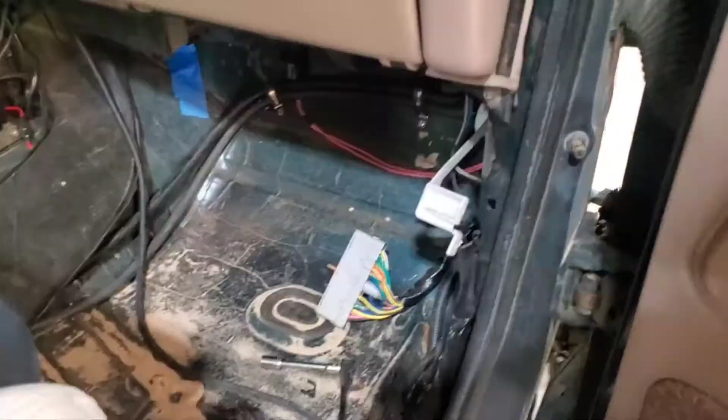Yes, I haven't vacuumed out the sand yet.

So, stock computer location. Mustang computer is out. Gone. I'm going to be joining the standalone ECU club. Brian Rasey, Brad Kumler, John Parks have all been running Microsquirt, and they seem to really love it with no issues. So, now that I'm having issues with this truck, I'm going Microsquirt. So I got everything laid out here, and I'm going to start prepping the truck and getting this installed. It's really pretty basic. It's pretty much plug and play.

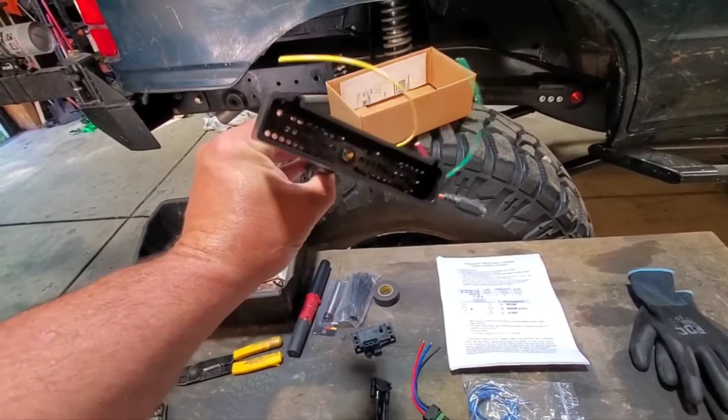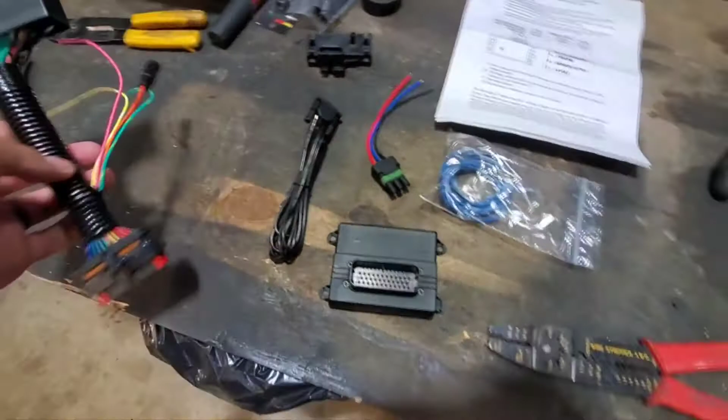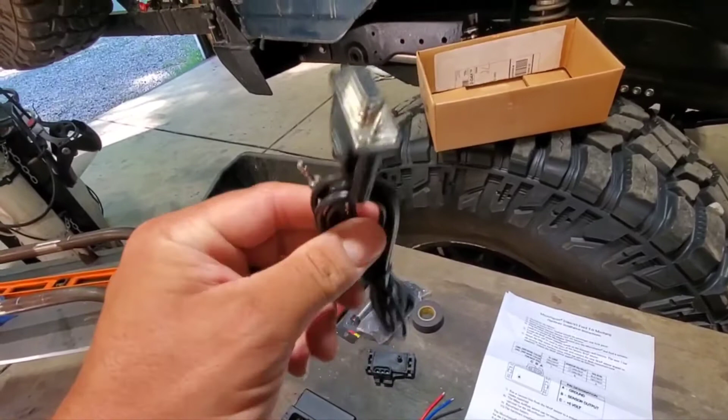You get the main harness, which goes to the factory computer harness in the truck, the 60 pin, and then the Microsquirt computer, which is really small in comparison to a factory computer. Look at the size difference. So like I said, this goes to the factory 60 pin plug, then this goes to the Microsquirt, and then you have a 9 pin connector, which is your programming tuning port for a laptop or tablet or Raspberry Pi device.

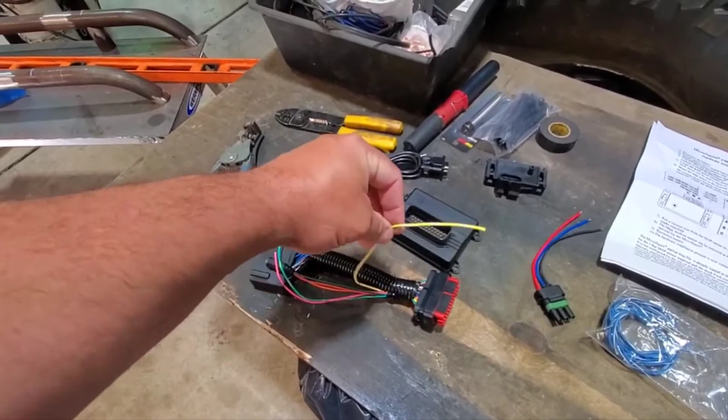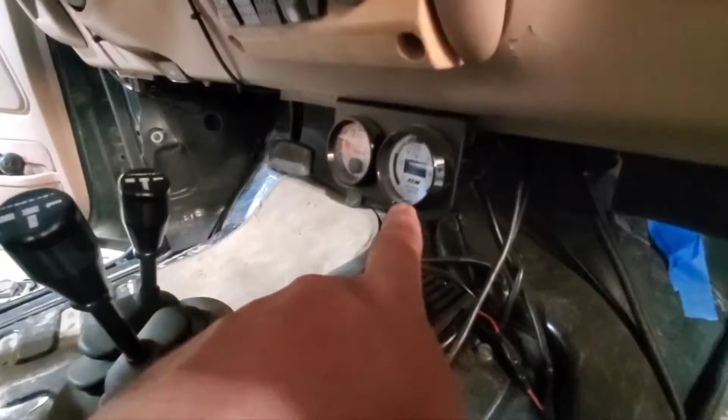You got 3 wires here. The yellow one's optional. That's to control an electric fan via the Microsquirt system. And then the green wire is a tach hookup. My tach's already hooked up and set, so I don't need to worry about that one. And then the last one is the pink wire. This is what goes to your air fuel wideband gauge. So my wideband gauge is right here. There's a white wire that supplies the output, 0 to 5 volts. So the pink wire will tap into that white wire. Just has a 3-foot run, no big deal. So that sums up that part of the deal.

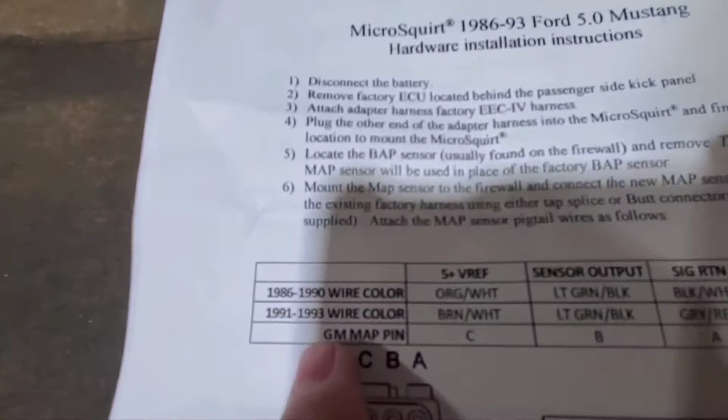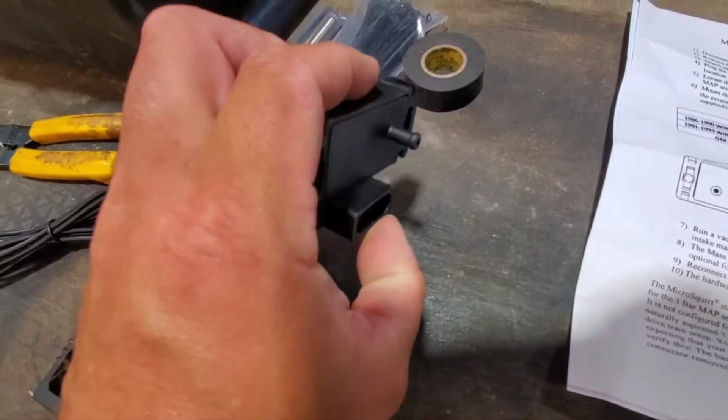And then the factory Mustang setup runs a BAP sensor, barometric air pressure. That gets swapped out with a MAP sensor. So they supply that, a Weather Pack plug, pigtail with 3 wires, and then depending on what wire harness you have, the corresponding wire colors to match the pigtail. And then you just supply a vacuum hose pickup for the MAP sensor. And that completes the install of Microsquirt as far as hooking it up. So let me get started.

So one advantage of the Microsquirt already is you eliminate the mass air sensor. I guess you can run it with it, but with my situation going on here, I'm still not sure if it is actually one of the computers. I mean, how likely is it to have 2 computers both acting up in different ways? This is the only other thing that I didn't have any extras to swap out with. I don't have another 24-pound injector calibrated sensor laying around to test and see. So there's a chance that this actually is what's causing some issues too. So this is going bye-bye.

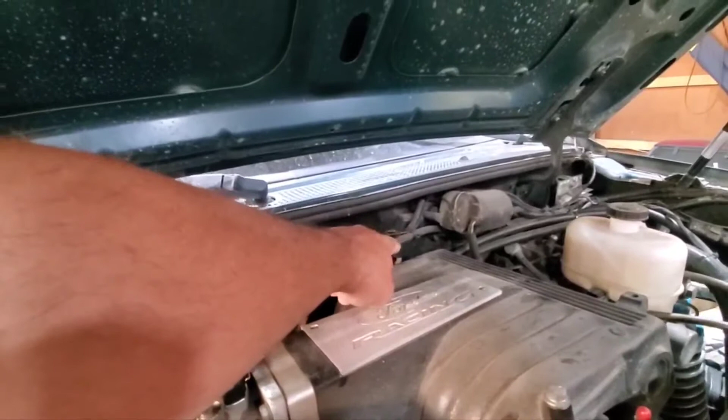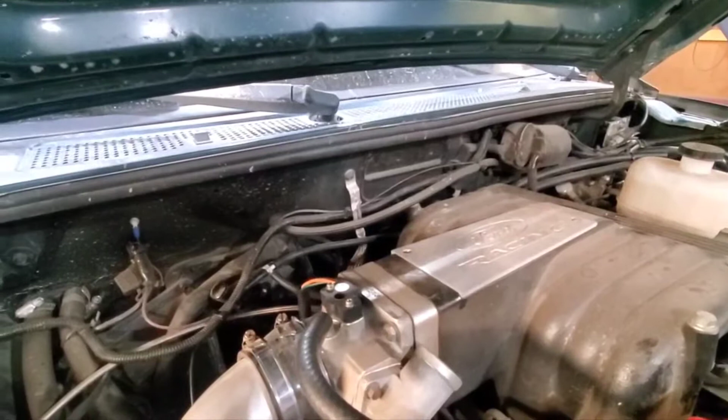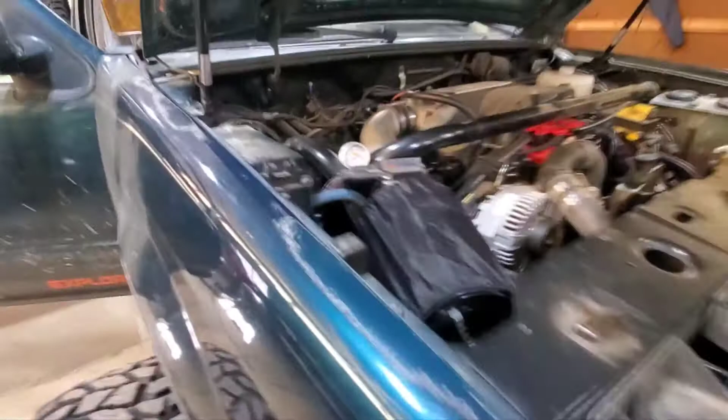My BAP sensor is mounted right here, so I'm just going to unbolt that. I believe there's enough harness to actually bring it over here. And then I'll figure out what wire harness I have color-wise and match up the new MAP sensor. Remember, this has a Ron Francis aftermarket brand new harness on it. So I gotta see what color code the Ron Francis harness uses, if it matches one of the 2 ranges of the Mustang harness.

So whether it's going to match an 86 to 90, or if it's going to match a 91 to 93 color code. But we'll figure that out here in a minute.

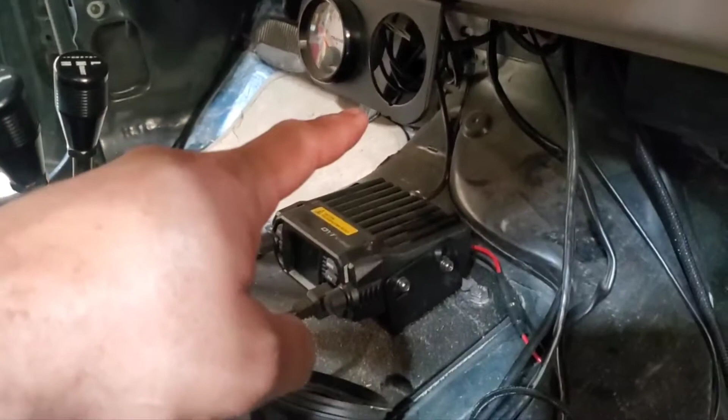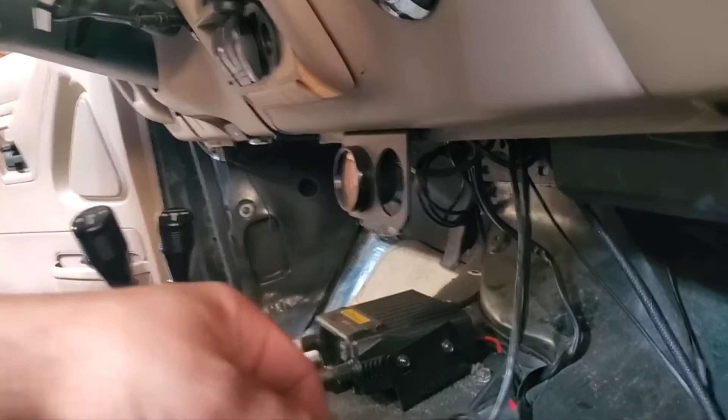Alright, so my first step is I already have an AEM air fuel gauge in the truck. So there's 2 harnesses on the back, a 4-pin and a 6-pin. 6-pin goes back to the actual wideband O2 sensor, and then the 4-pin is what gets your power and stuff from power source. And the white wire is normally a pigtail, but since it's already all wrapped up behind the dash, I wasn't going to pull all that out just to get the pigtail, so I just spliced into it right here. Adding on a wire lead here, and then I will cut it to length over here for the PCM side, to connect the other side to the pink wire here.

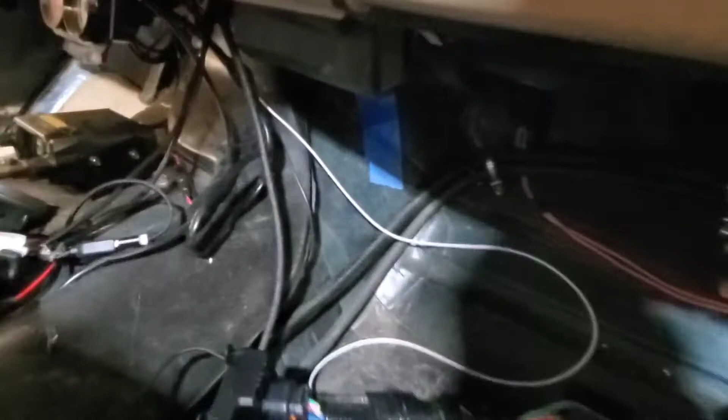Alright, so the white wire's tied in. Everything's been twisted together, soldered, heat shrink tubing, gauge is back in place, plugged in, and then like I said, the white wire taps into the pink wire, which is also obviously wrapped together, soldered, heat shrink, and then I just wrapped the excess with some electrical tape to keep this plug kind of fixed so it's not pulling on the wires.

So the air fuel gauge wire is complete. The pigtail harness is bolted to the stock ECM 60-pin plug. The Microsquirt computer is clicked and plugged in, and the laptop serial connection is plugged in also. Now let me get the map installed.

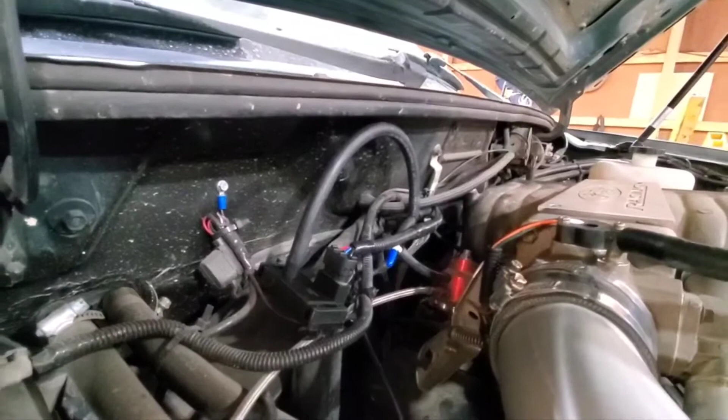Alright, so I got ahead of myself here. I meant to take a video of taking out the BAP sensor and swapping over to the new MAP sensor for the Microsquirt. It's not a big deal. Earlier in the video I explained the color codes and the harness. So there's plenty of harness on the Ron Francis. And so here's the BAP sensor that I took off with the color code.

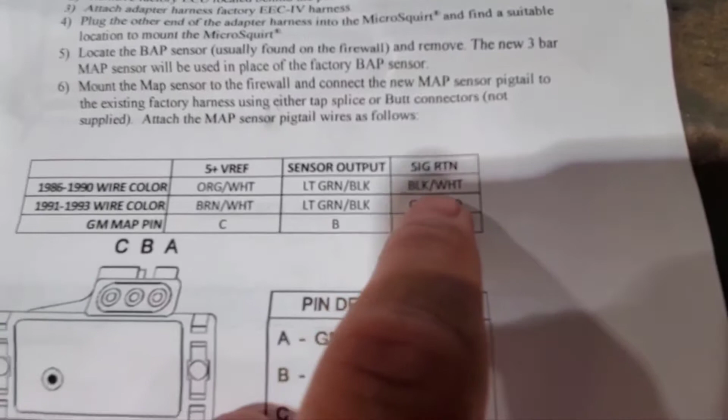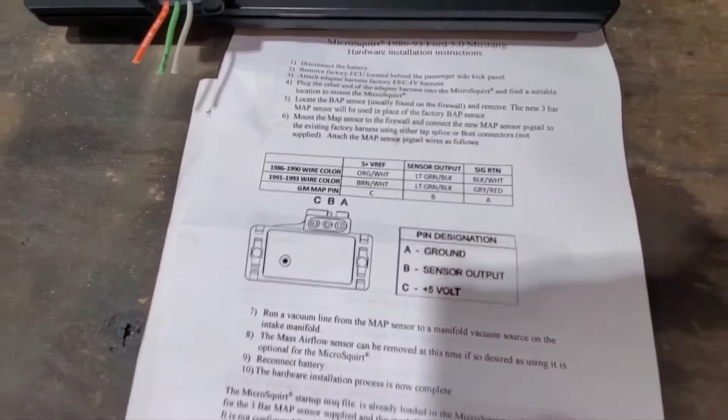So the Ron Francis basically matched the 86 to 90 wire colors. So the 5-volt wire, orange white, is orange on the Ron Francis, and then the sensor output, light green black, is the green wire on the Ron Francis harness, and then the signal return black white is basically gray on the Ron Francis harness. So the Ron Francis harness kind of follows the 86 to 90 color code anyway. So I just matched the colors with that, and you're good to go.

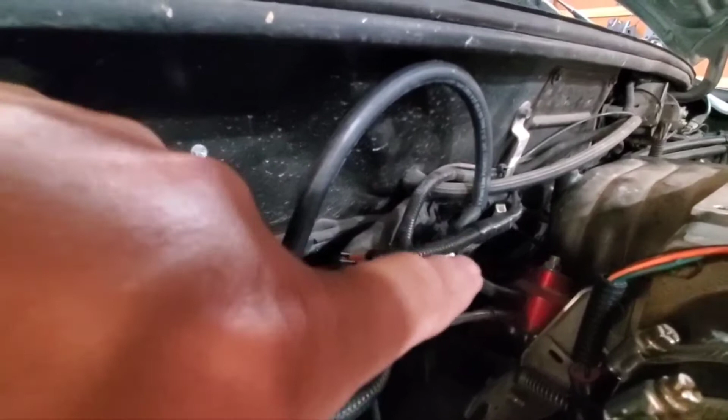So on the new MAP sensor, it's red, blue, and black. So the red went to orange, blue went to green, and then black went to the gray, on the Ron Francis harness, that is. Then I just added a vacuum tee, and then gave myself a little extra 1/4 inch vacuum hose. Still have to mount this yet. I'm gonna mount it somewhere. I need some longer screws though. It's a little bit thicker unit.

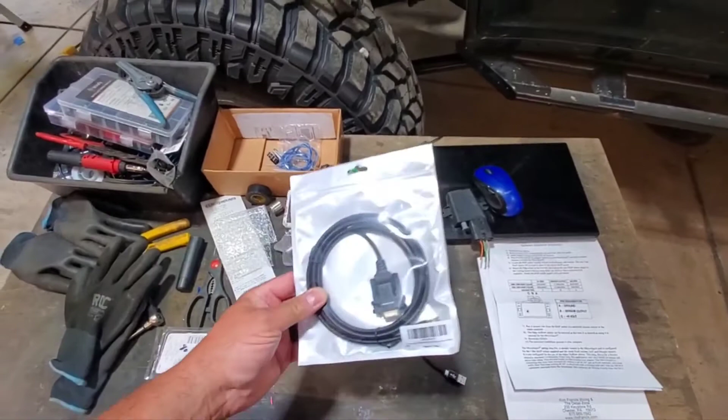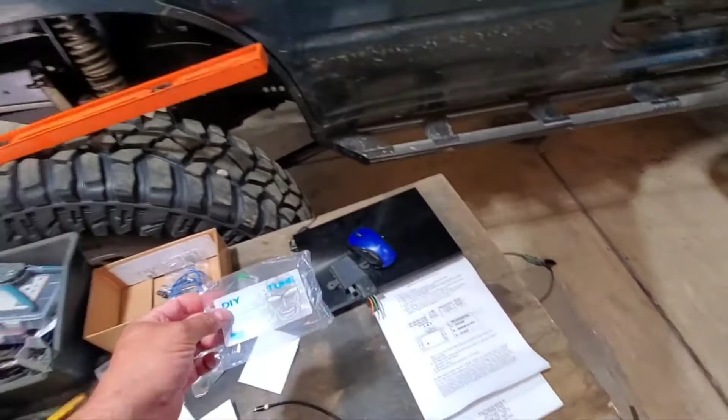So everything's all set. And then a lot of people have issues with the actual serial to USB adapters. So I had originally bought, because I did look up their instructions, and basically they want you to have a serial to USB that has an FTDI chipset in the cable. So this serial to USB has that chipset, but then our other buddy Eric Doucette recommended going to these guys, DIY Autotune, and buying their serial to USB adapter.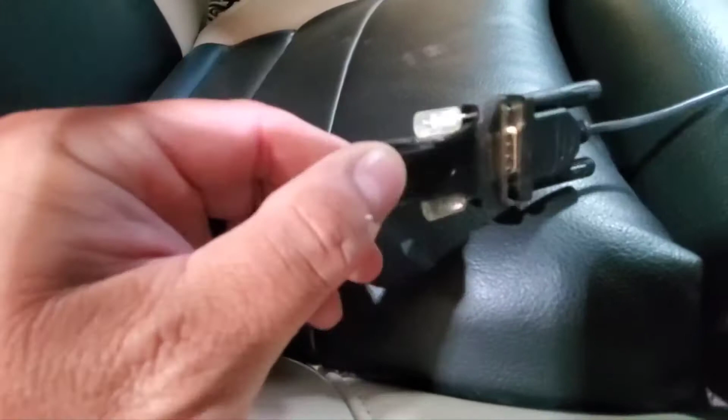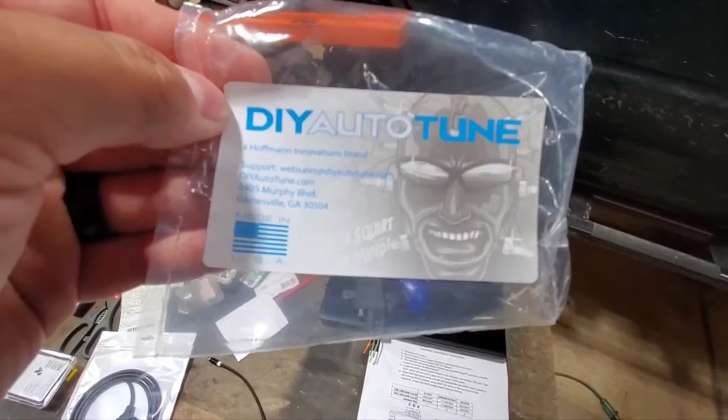It's guaranteed to work. So it comes as a short, hard type unit, and it does come with a USB extension pigtail harness too. So I chose to go with this brand because it's guaranteed, and they have full support. So I'm just going to return that one back to Amazon, even though that one probably would have worked. I don't even need to bother with it at this point.

All right, so that pretty much shows all of the parts and components of the Microsquirt system, how it's installed. I mean, it's really a real basic install setup. You're basically only touching a minimum of 4 wires. The signal wire, 0 to 5 volt from the wideband gauge, and then the three wires in the pigtail for the BAP to MAP sensor. And then you got the optional tach hookup and electric fan. So I already have that Flex-a-lite variable fan controller set up on this, so I'm just going to keep using that.

And then all of my gauges are Speedhut gauges, and obviously my tach's already set up. So if you already have an existing car, truck, whatever, that already has some stuff in place, you don't need to mess with it. But obviously if you're starting from scratch, then you would hook up whatever wires that you want to add to it. And then if you don't have an air fuel wideband gauge set up yet, obviously that needs to be added.

So huge shout out to Brian Rasey. He is the go-to guy here in Michigan with our group, especially our Team Ford that we have here in Michigan.

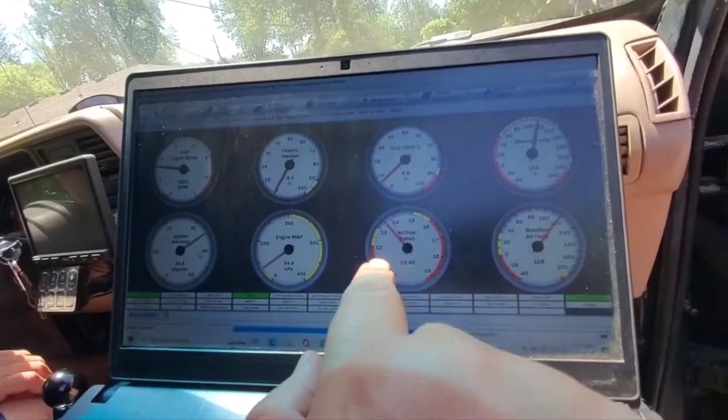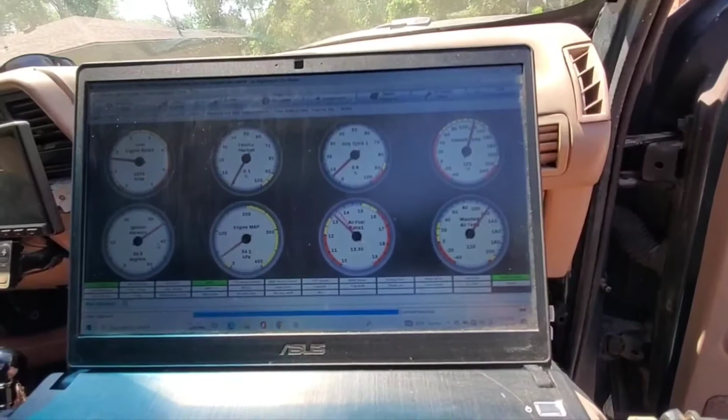Alright, we're going to do some cold start and some street tuning on Dan's truck here. So, I'm Brian Rasey from Random Adventures. So, I'll show you here real quick. I'm going to zoom in here. We're in warm-up enrichment right now, so 13.5 AFRs. That's actually pretty lean, but it's warm. We got 120 degree coolant temp, 120 air temp under the hood, so we're going to go for a cruise, get it up to normal operating temp, and get it out of warm-up enrichment. Then we can start making changes to it and see what it's doing. Rolling.

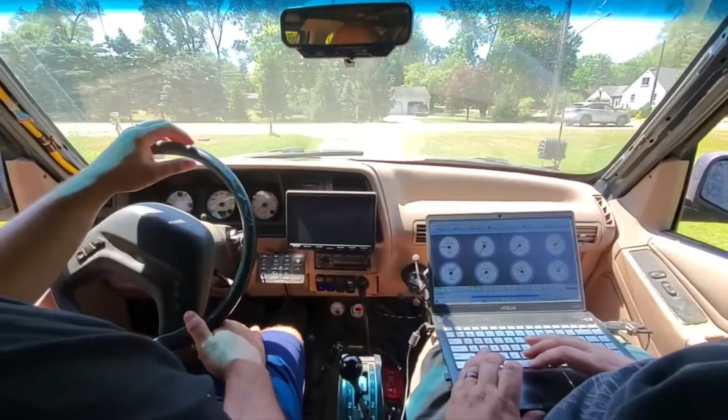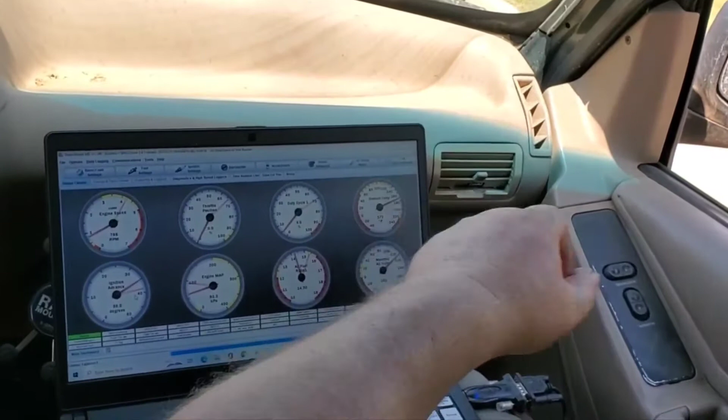All right. So you've already been doing a substantial amount of auto tuning. Yeah, I did probably a good 10 miles of street driving, and then probably almost an hour off-road with 4-low, loading up everything. Nothing crazy, but... All right. So for now, we're just going to watch until it gets up to temp. Oh, okay, so warm-up enrichment just turned off. So it must be after it passes like 170 degrees. So now we can go ahead, and you saw that little hesitation there.

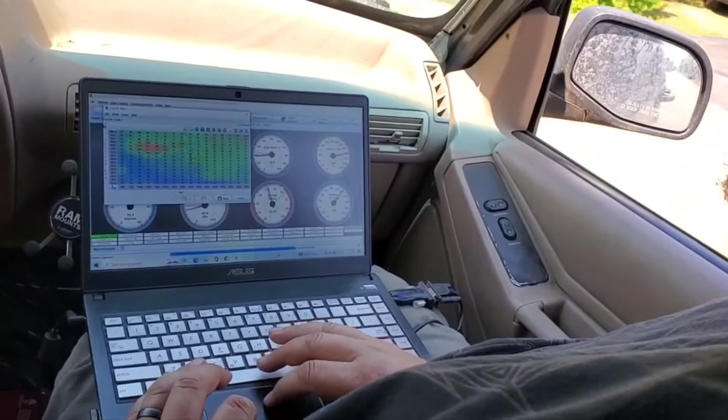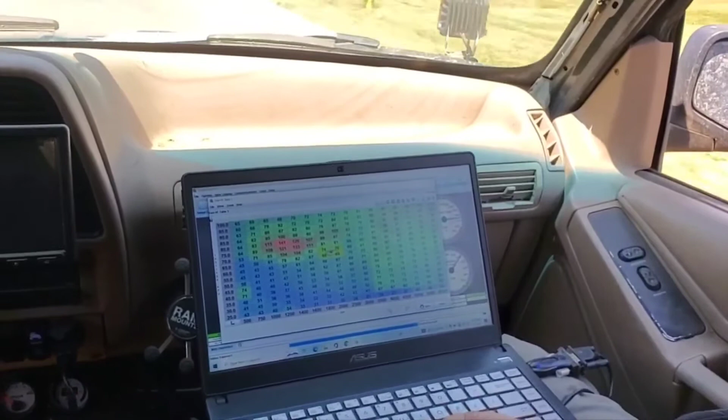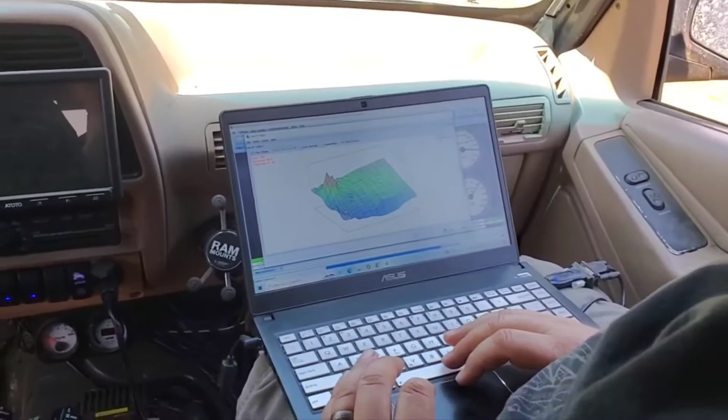So I'm going to open up the VE table here. The windows, too much noise. So you can see on the 3D map here all the peaks and the valleys where it's rich and lean. So up here, that's kind of a lean spot. Need to richen that up. Oh, I'm sorry, that's a rich spot. Blue would be lean. A lot of these little valleys down here need to be brought up. That's probably the hesitation right at initial takeoff.

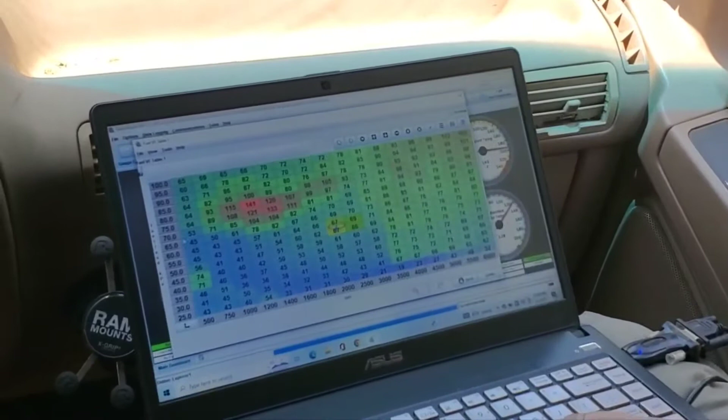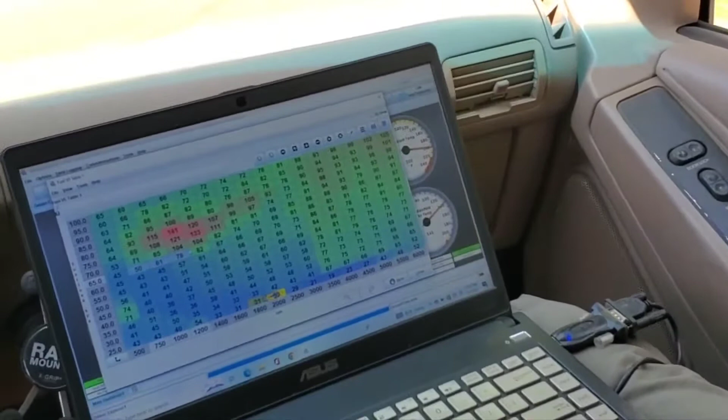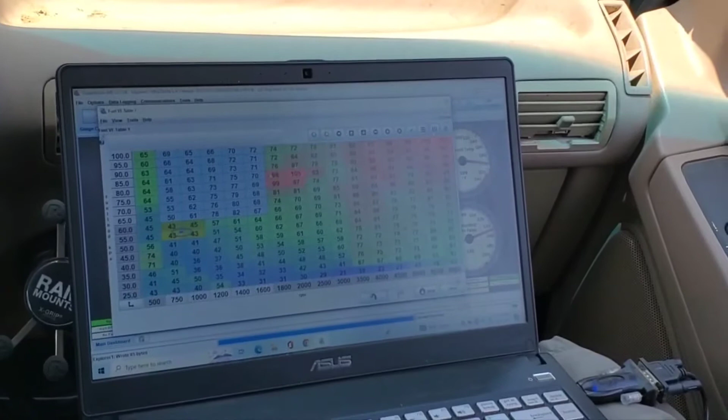So what I'm going to do, I'm going to highlight, I'm going to keep going for a minute. Turn right. Smooth. So all these cells here, we got all kinds of dips, peaks. We're going to smooth all of that out. So I'm going to interpolate on this side here. So that interpolated everything going up. Smooth all those numbers out. Then I'm going to come over to here and I'm going to interpolate it this way. Using this button here, click it, and watch the numbers change.

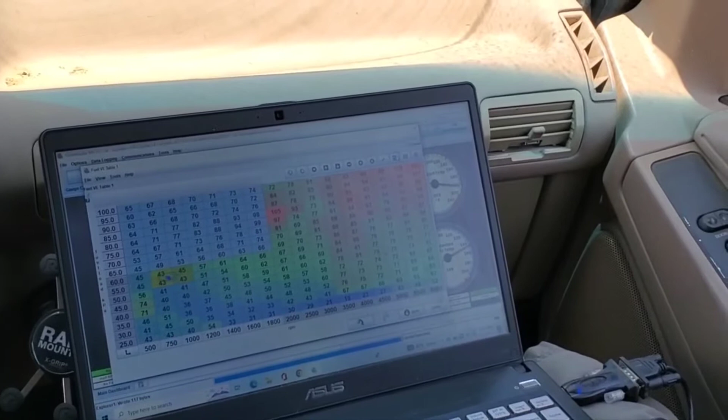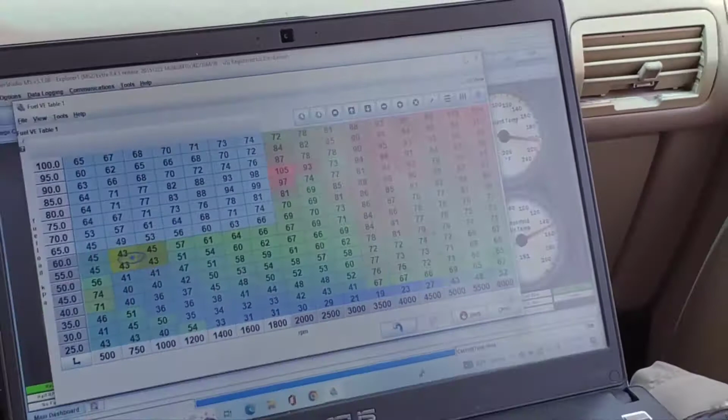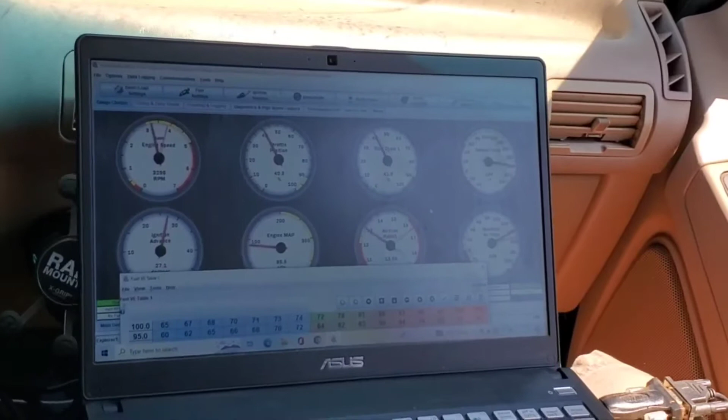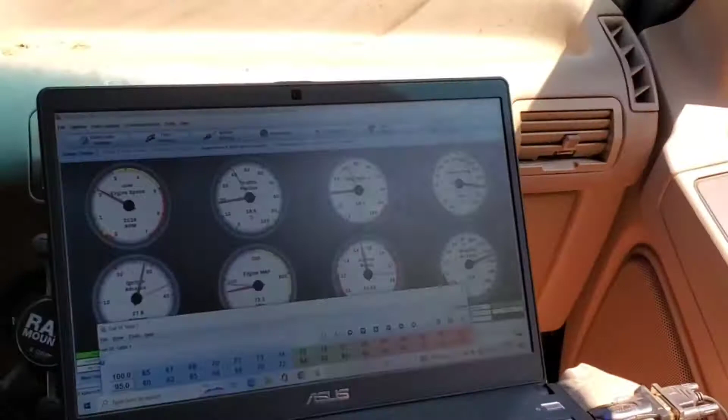Drives pretty good as far as I know, but when I get on it 2,500 or so up, I get these like little hesitations. Yep. So where you're talking 2,500, your map is still all kind of wonky. So I'm gonna highlight here down over to capture that weird spot and interpolate it. Okay.

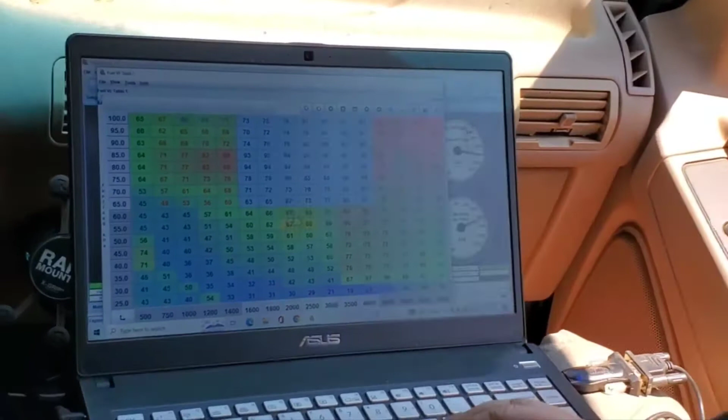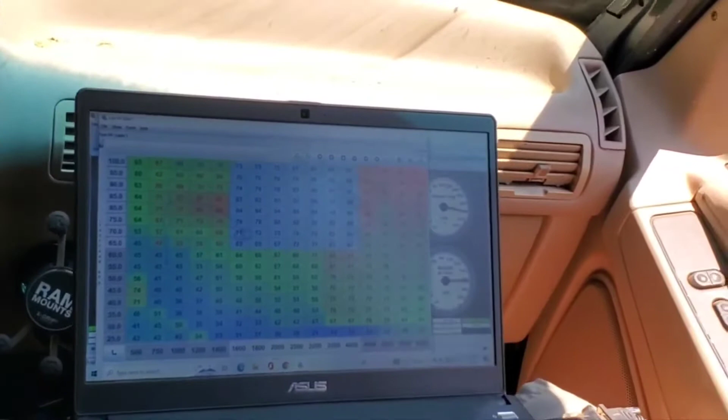Did you ever get Megalog Viewer? I didn't do that yet. Okay, alright, so we can't data log yet. See on real time, right where we're at.

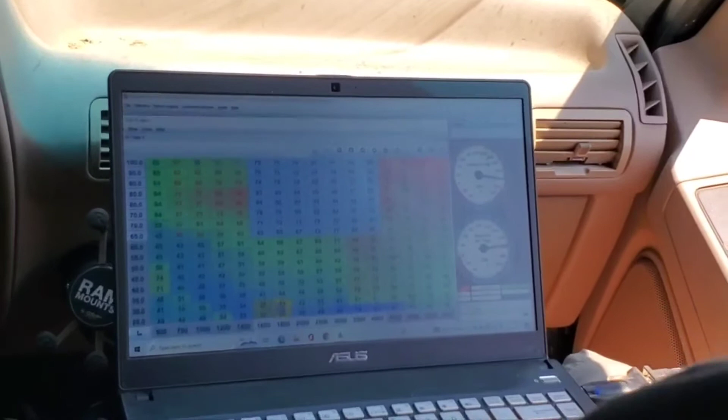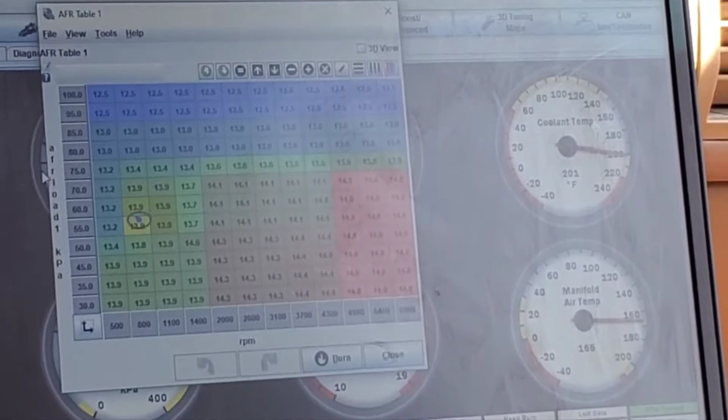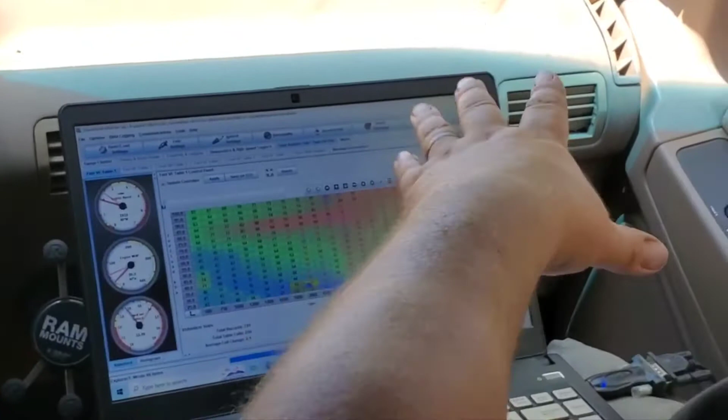Out a lot of fuel up top, or was breaking up. So right now it's auto tuning. You can see the cells in the yellow and green is where the amount of time it's spending there. The darker shade of green, the more time it spends in there. The red and blue is it adding and taking away fuel in those cells. You see the different colors there.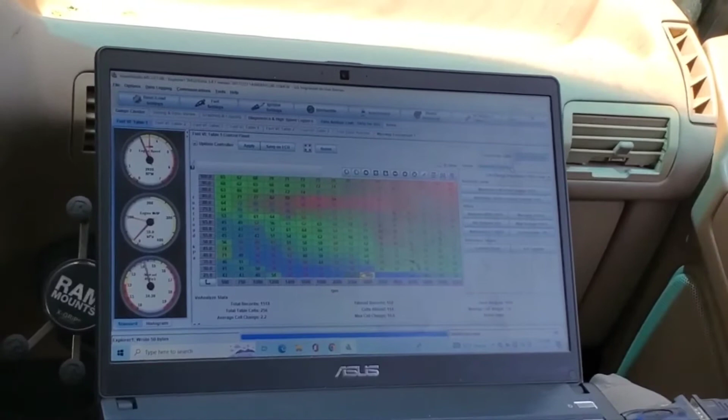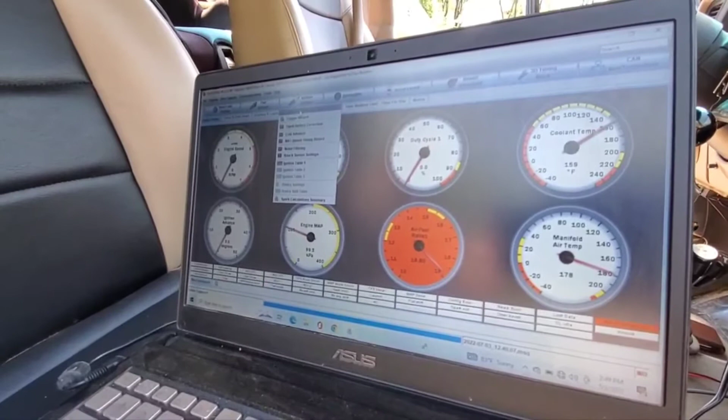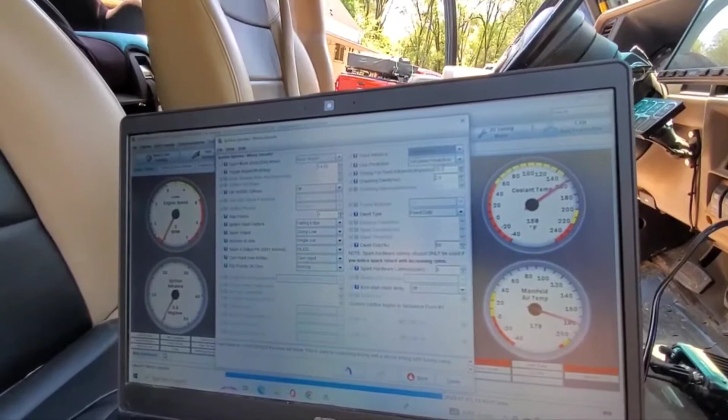Right, so we're going to verify that the timing on the motor is in sync with the timing that the laptop is showing. So we already got the timing gun hooked up. So we're going to go into the ignition settings, very first menu here. And over here on the top right, it says fixed advance. Right now it's set to use the timing table. So we're going to change this to fixed. And now this line down here, timing for fixed advance, says 10 degrees.

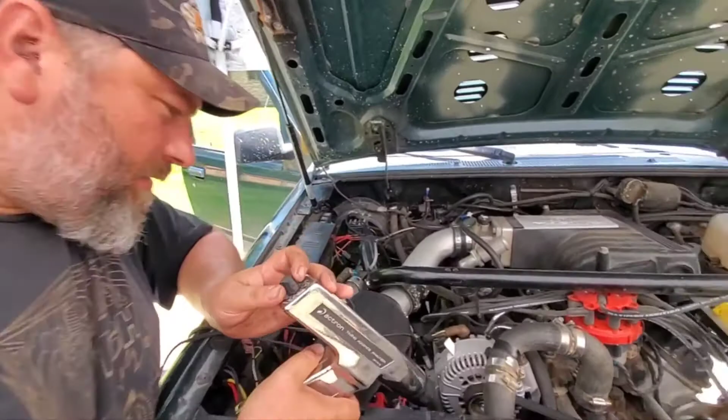So we're going to fire up the motor, and using a timing light, we're going to make sure that the timing on the motor is the fixed 10 degrees. And then we know that they're in sync. So we got the balancer marked for 0, top dead center, using a dial back timing gun. I'm going to go ahead and line up the mark on the balancer to the pointer, right there.

Where's that? Trying to zoom in here. Where is it? There we go. If I'm blocking it, there you go. Here we go. Lined up. And timing is at 5 degrees. So we are off 5 degrees, retarded.

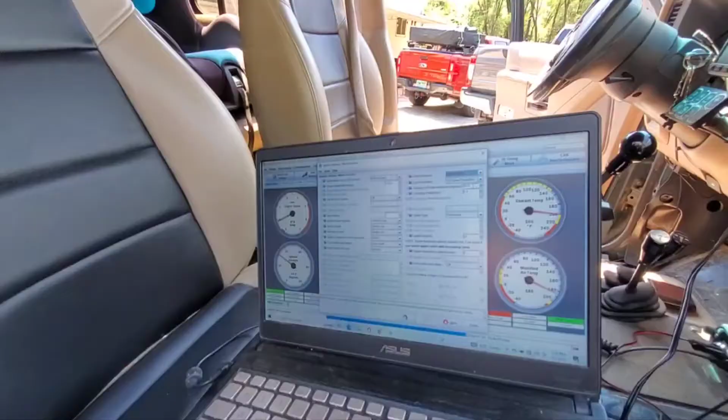So, nice thing about this is we don't have to touch a distributor, we don't have to do nothing with it. All I'm going to do is go on the laptop where it said 10 degrees, I'm going to change it to 5. And then they'll all be in sync, and then we just change it back to use table, and it's going to use the timing map. Right here where it says 10.0, we will just change that to 5.0.

We're going to burn it. Come on, come on. There we go. All right, now we'll go back to the motor. Now verify. There it is. 5 degrees on the gun, 5 degrees on the laptop. Now, stay here, watch what happens. I'm going to switch that map or that table back to use timing advance. Watch what the motor does.

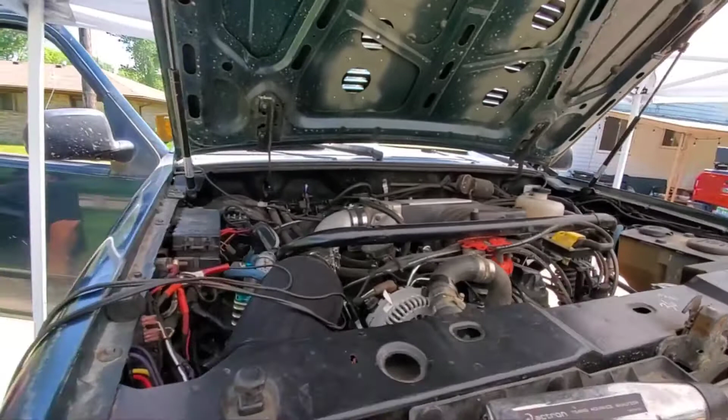Now the timing is set correctly, everything's in sync between the Microsquirt and the motor, so it's all good now. Now we can go ahead and do some more tuning. Now we know that it's been running around 5 degrees retarded compared to what the laptop has been saying, so that's quite a bit, it's a lot of power.

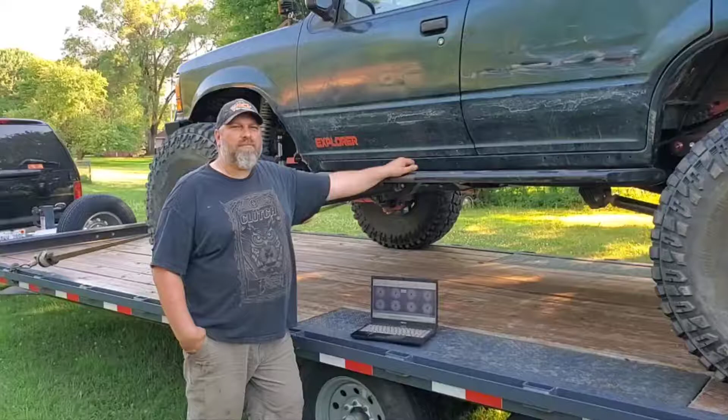Alright, so I'm done with my portion of helping Dan for today. We did quite a bit of street tuning on it. Verified that all the AFRs look good across the board, idle, cruise, under wide open throttle. The richest it goes is 12.5 to 1, which is perfect. Look at the previous scenes you saw. We verified the engine timing on the motor and that it's synced up with the laptop.

I did have to make an adjustment to the trigger wheel offset because even though the computer was connected and controlling the advance, the computer was showing 23 degrees and the engine was only showing 15. So you use the trigger offset to bring those in line. Doing that basically woke this thing up a pretty good amount. You're talking, it was off 5 degrees base and then it was off another 10. So that's quite a bit of power that it was down just from the timing being retarded. So we got all that straightened out.

After we went out and retuned it again, we found the timing table was a little aggressive. We were getting some detonation under the high load areas around 3,000 to 4,000 RPM. So the nice thing about this is we can go in, narrow in on that area, drop the timing back, get rid of the detonation, and then everything's good.

We did run into a problem, which is why this Microsquirt tuning system is so valuable. The truck was breaking up, it had a miss. Anytime we hit 3,000 RPM, you could see the tachometer start bouncing, you could hear an audible miss in the truck. Dan's already done plug wires, spark plugs, coil, all that stuff. There's no reason it should have an ignition problem.